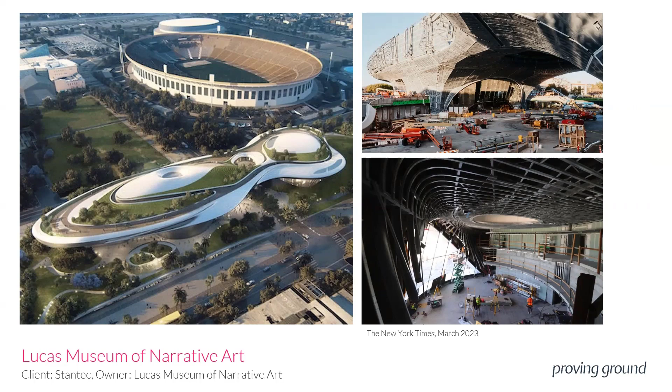Similarly, a project that is very much well underway in construction at the moment and slated to open, I think now in 2025, is the Lucas Museum of Narrative Art. For me personally, I was really excited to work on this project because of my affinity for all things Star Wars and science fiction, and the tie to George Lucas is extremely exciting.

We were brought in by Stantec, who is the architect of record on this project. They partnered with MAD, who is the design architect. We implemented a set of workflows that allowed for this kind of project management to occur with the complex geometry, from exterior paneling systems to some of the development of landscape design to a number of the interior spaces, and the kind of translation of geometry and data between the Rhino and Revit platforms were instrumental.

Now we're kind of seeing the results of that having occurred, by way of these very powerful construction photos. On a monthly basis, I feel very fortunate to be able to see 360 walkthroughs of the site, and we can start to see how some of those geometries that we became very intimately familiar with are making their way onto the project.

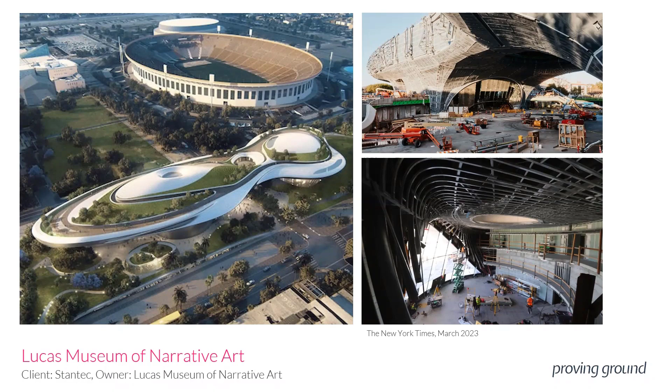That leads into the various paradigms that Conveyor supports, and some of the new workflows that are available in Conveyor V4.

As of this moment, Conveyor supports two types of workflow paradigms. One is based around an import workflow, wherein if you have a Rhino file, you can import selective elements into Revit using a user interface that lets you select the file, select various elements, and then bring them over without having to open up Rhino, and even without requiring a Rhino license. We were able to use Rhino's open NURBS file format and extract information and recompose it in Revit using the Conveyor platform.

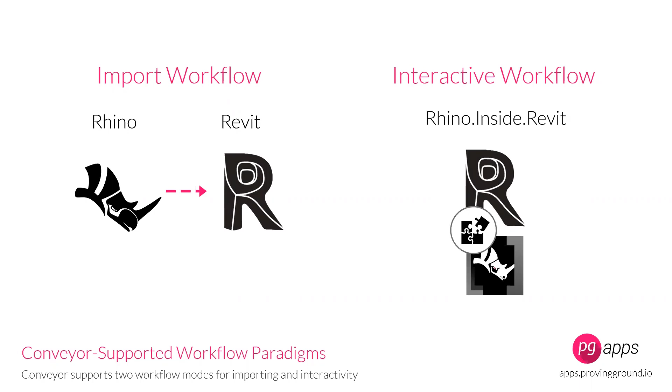We also are able to use an interactive workflow, which is built on top of the pathways established through Rhino inside Revit. Rhino inside Revit is a very popular interoperability scheme that allows Grasshopper to run inside of the Revit environment, and you can do all sorts of things with this platform. What we're able to do with Conveyor is Conveyor can sit within this scheme, and you can then start to use Rhino's direct modeling interfaces, and use Conveyor to do one-click transfers of objects as you model them without the need to touch any of the Grasshopper components. So it adds another level of a very simple integration to the workflow.

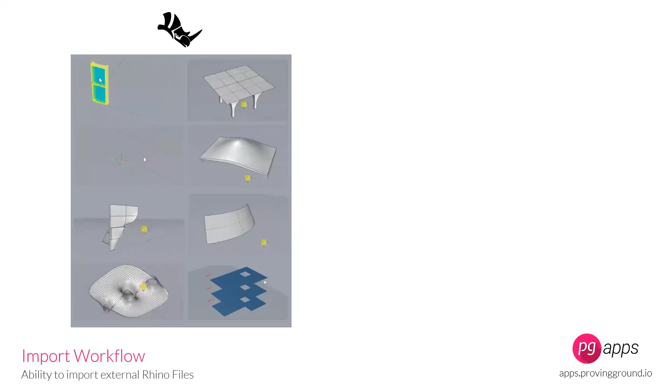The basic philosophy of this toolkit is really about how you start to map geometric elements and components to building information modeling definitions. That's really the challenge of this kind of interoperability and integration between Rhino and Revit. It's the idea that within Rhino, you have a model-anything type of philosophy, and you're working with raw geometry most of the time. In order to get that over into Revit, you have to start to prescribe meaningful categorizations and definitions for what those objects represent.

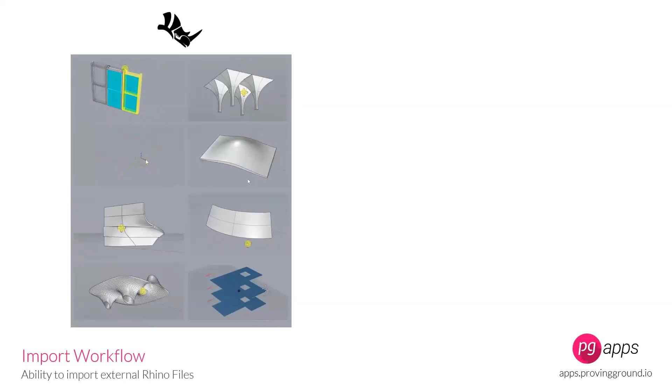So if you have a surface, that surface could be a wall, it could be a floor, it could be a facade element, or maybe more of a specialty feature within the design. And so there needs to be this way of classifying this workflow and these geometries for the workflow.

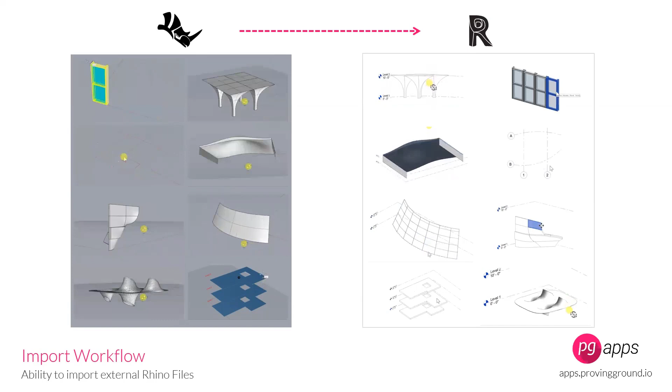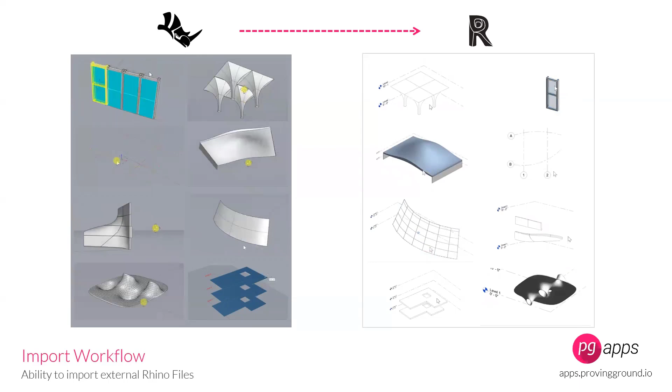What Conveyor does is it provides a user experience for mapping those types of definitions such that when the element is created in Revit, it has associations that are available to the user and are made possible by the Revit API, which is quite extensive but also has various limitations. Anyone that's worked with the Revit API knows there are boundaries with which you can do things. You can bend the rules of Revit, but not necessarily break them entirely. So we're operating within that space to achieve these mappings.

What you find with Conveyor is this system of categorization. You might have a poly surface in Rhino, and you need to be able to say, okay, what is this poly surface actually when it comes to the classification of Revit objects. With Conveyor V4, we've expanded on this, so you can see here you have this ability to import component families. There's mass-based curtain systems, floors, roofs, structural framing members, and all sorts of subcategories within that.

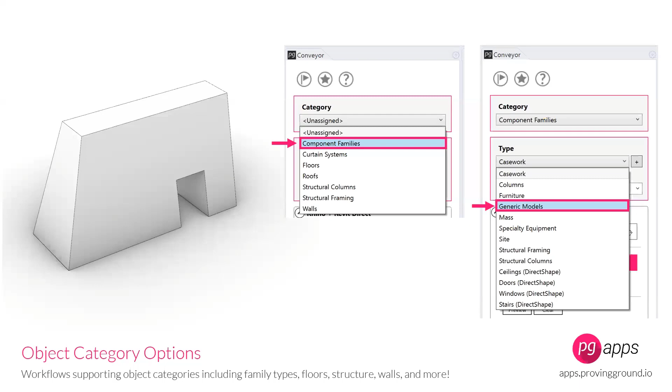One of the things we've made possible with Conveyor V4 is the ability to bring over curtain wall grids. In past versions of Conveyor, we could bring over walls, and one of the things we've been hearing from users of many different platforms dealing with integration is the ability to bring over curtain wall grids and have them assigned to the objects.

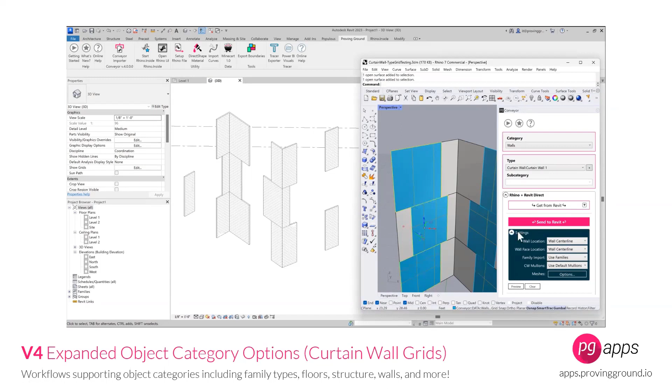Here, what we're able to do is define horizontal and vertical curtain wall grids, very standard, and we have this ability to generate native curtain wall elements with mullions that are editable, or grids that can be reassigned to different types.

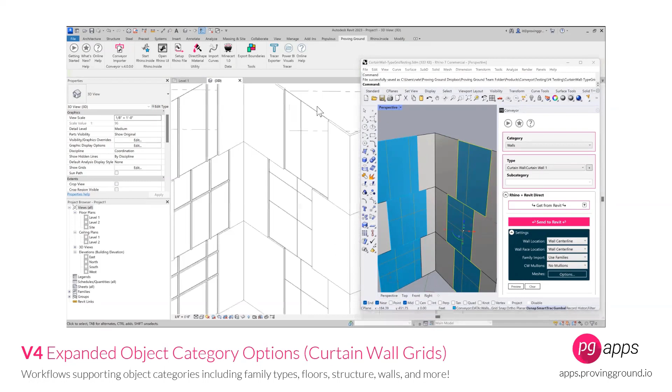The resultant workflow here are native wall objects that have the mullion grid datum. The user has options of auto-assigning a default mullion scheme to the grid, or you can leave the grid alone and assign mullions of your choosing after the import. We saw this as a gap to fill, and we thought Conveyor offered a structure that would allow for these types of elements to fit within the workflow paradigm established in previous versions, V3, V2, et cetera.

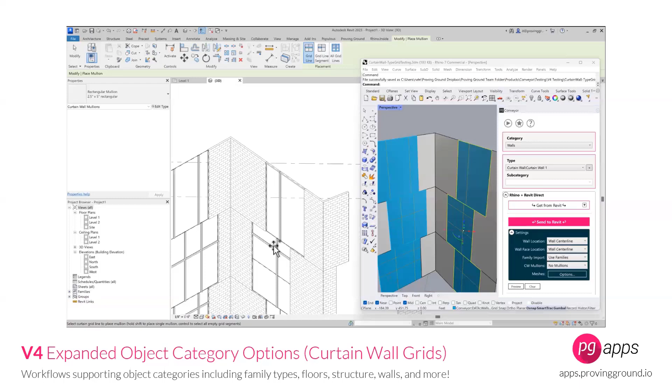Another thing we've heard from our customers and clients is the support for blocks. Now, Conveyor has supported blocks for a while, Rhino blocks, as in collections of object geometry. But what many people do when creating blocks in Rhino is use nested block elements, so you might have a block that is made up of a variety of other blocks.

That was something we wanted to fully support by enabling a geometry transfer that would allow blocks containing nested block elements to come over. As a test, one area we see people grabbing 3D geometry from is the SketchUp 3D Warehouse, which has a whole slew of different things. When you bring a SketchUp object into Rhino, you end up with block elements and nested block elements. So we wanted to see how we could take some of these assemblies, which in some cases have very deep, detailed geometry with subcomponents, and make sure this is supported through the workflow. What you're seeing here is a set of blocks with numerous nested components, layers, and other block definitions within.

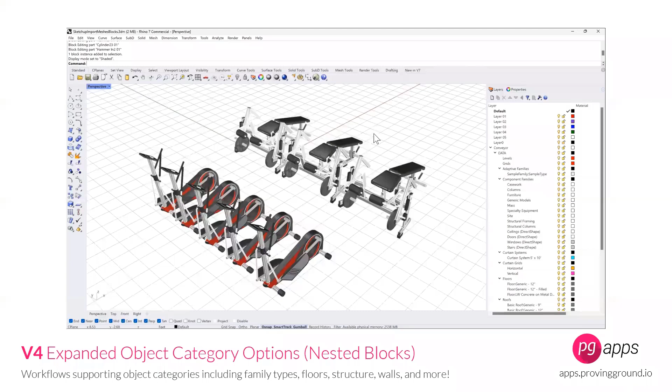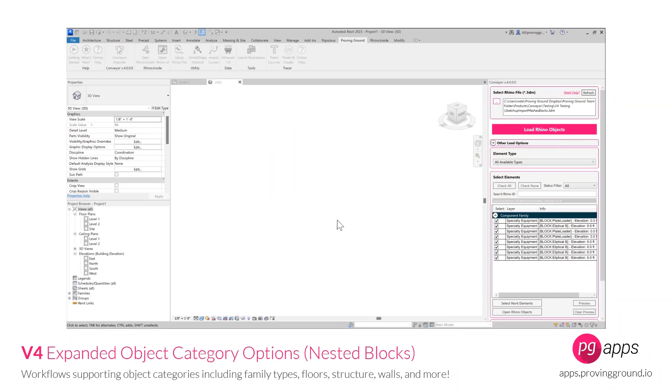What we're going to do here is go into Conveyor and load those elements in. Conveyor is going to drill down into the block definitions and pull out and reconstruct the nested geometry in a single Revit family. So what you have here are Revit families that have the nested components brought in.

Another thing to note here is that this also supports mesh-based transfer. So the underlying geometry in some of these cases is mesh-driven, and those are being dropped into a Revit family, further allowing certain types of geometries to be supported across these platforms.

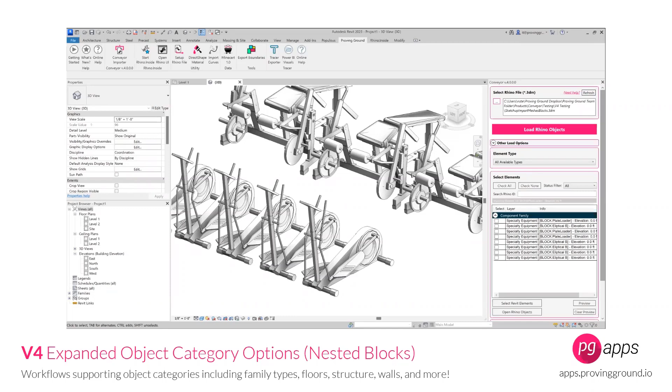Going on to the next slide here. Another area that we kind of expanded support around was this concept of materials.

In previous versions of Conveyor, if you were to transfer a B-rep or a polysurface-based block over, Conveyor would try to search the Revit library for materials that match the Rhino material assignment. So if you had an object in Rhino with a material named yellow, it would jump over to Revit and check if there was a material named yellow and grab it. If there wasn't a match, it really wouldn't do anything—it would just create a blank entry on your object.

What we've done in Conveyor V4 is introduce this idea of transferring basic material properties from Rhino and creating the Revit materials if they don't exist. So what that allows us to do is, say, if we have this...

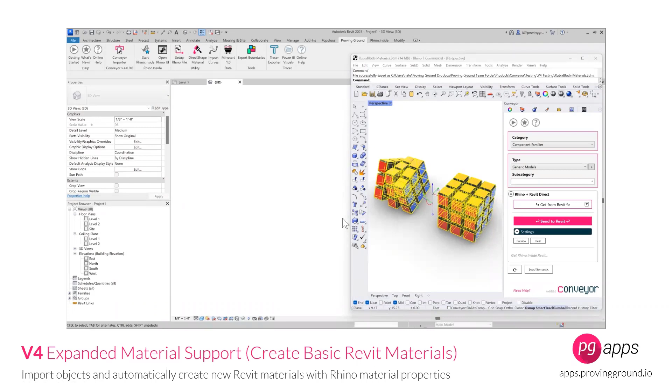In this case, a fun Rubik's Cube model that has a number of different colored materials created inside of Rhino, we can have those materials transfer over with the object itself and get assigned to the resultant Revit object. So what you're seeing here is the families being created, and the material that came from Rhino also being created in the background in Revit and assigned to the object. Those become, for these families, a set of editable properties that you're free to change or edit if you want.

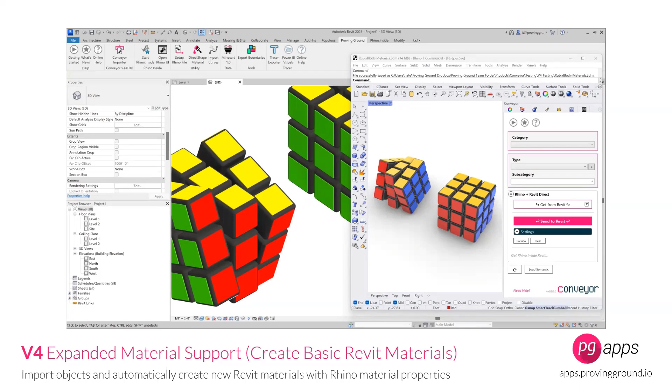We see this as an important step forward for supporting things like visualization and rendering, and also further tightening the level of integration that can exist between these two platforms.

A couple of things have happened on the Rhino Inside integration that we've built via Conveyor that we think are pretty exciting.

We wanted to figure out ways of having a more dynamic back-and-forth user experience for some of the common element types people are engaged with. In version 2 of Conveyor, we first introduced the idea that Conveyor could be launched through Rhino, as Rhino is operated, or as Rhino may have been launched through Rhino Inside. That means the ability to click on an element and, through Conveyor, hit send to Revit. Or if you're in Revit, you could click on a Revit object and say send it over to Rhino.

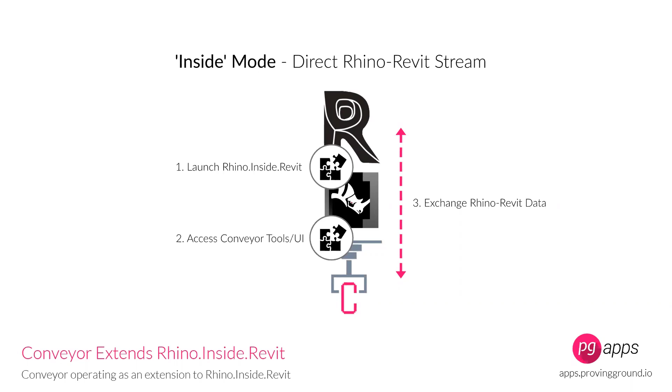That produced this type of workflow where you can select a number of different elements. You have Rhino and Revit operating in parallel, and the Revit objects are created from that Rhino-based information. No Grasshopper use is being implemented here—it's a very simple workflow. If you know how to select elements and click send, that's the basic premise.

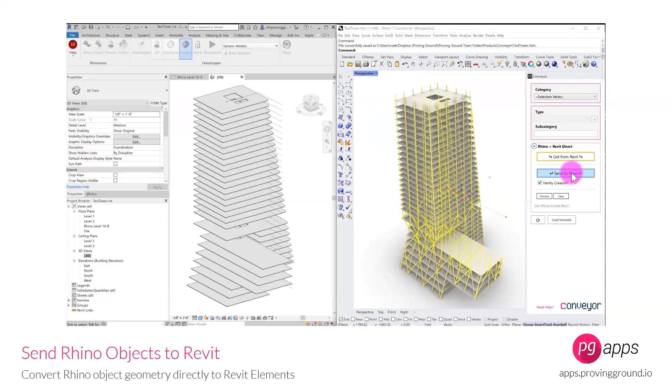So what we wanted to do is build on that a little and ask: what if a user needed to send over, say, a collection of floors to Revit, and then made a few edits to those floors on the Revit side? Could you then pull back some of that edited geometry into Rhino, creating a kind of push-pull type of workflow?

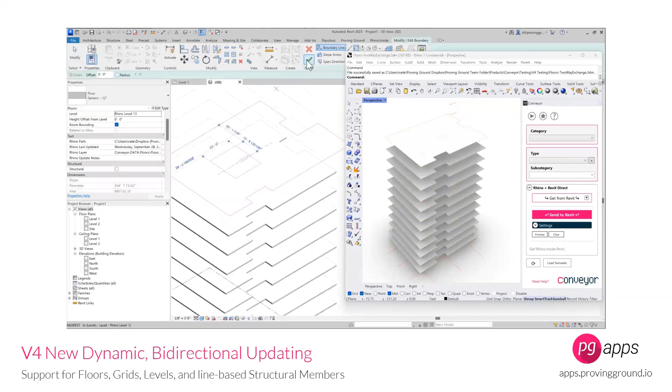We've introduced a level of dynamic updating here. In this case, using floors, we can create a collection of floors in Revit, then edit those floor profiles—creating an opening or editing some of the boundary conditions—and then bring that edited floor back into the Rhino world. We can now do what's called a dynamic update, which will find that previous floor and recompose it using the updated Revit geometry. Then we can continue working on it.

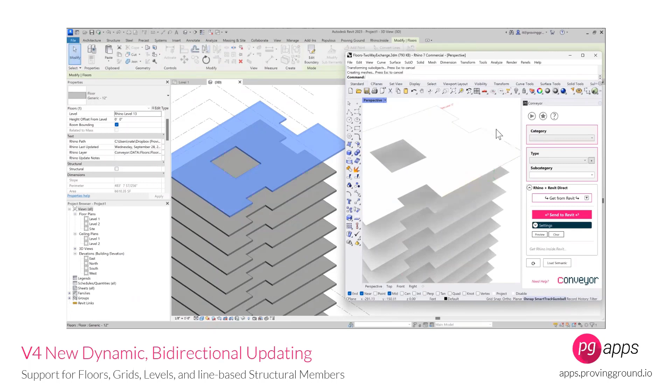So let's say you're now going in and editing the boundary condition of the newly updated floor that just came in from Revit. We'll go through that process, and then select this updated Rhino floor and send it back into Revit. So you can start to envision some of these really powerful push-pull capabilities through this interface that we're pretty excited by.

In version 4, we're supporting floors, grids, levels, and structural framing elements as part of this paradigm, and we'll be expanding those element types as it becomes feasible. Floors are a very good use case for this because of how the mapping of raw Revit or Rhino geometry works in the context of Revit and vice versa, so there's a nice way to parallel this and track updates across the platforms.

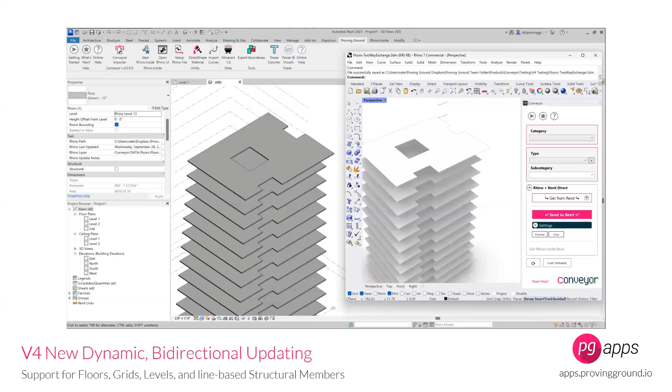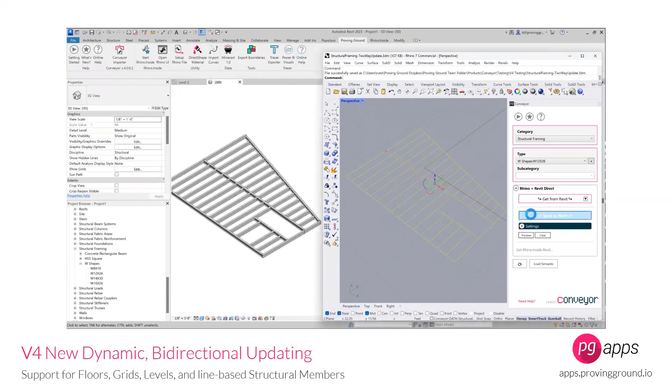So you're again doing that kind of push-pull operation, almost treating Rhino as a wireframe sketch, which then drives intelligent building information modeling elements. Changes to those BIM elements can then go back and transform the sketch using this dynamic update capability.

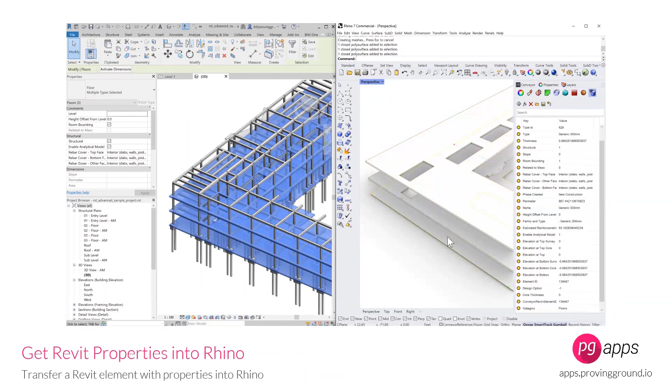Just as a bit of a recap about some of these integrations, the ability to go back and forth and the kind of previous features that have been introduced in Conveyor are still very much present and preserved. So if you're using workflows that you're used to and comfortable with, those are still present.

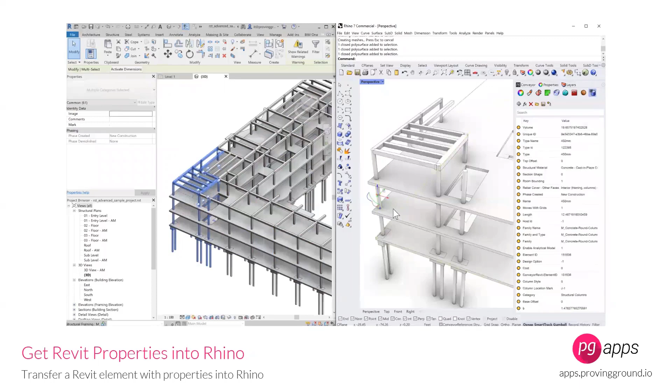This is an example of features that have been introduced in the past for not only converting objects into Revit, or from Revit into Rhino, but also showing that material, object properties, and parameter information is being transferred over as well. And as we go forward here, this is kind of where Conveyor V3 left off.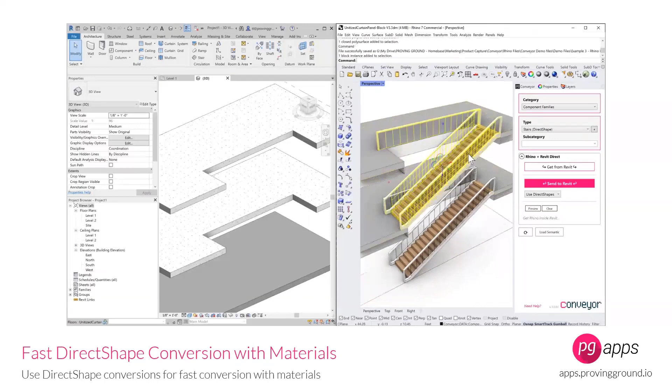We're bringing over block elements and direct shapes with materials being mapped over to them, creating these more sophisticated assemblies and family components and direct shapes using the transfer protocol.

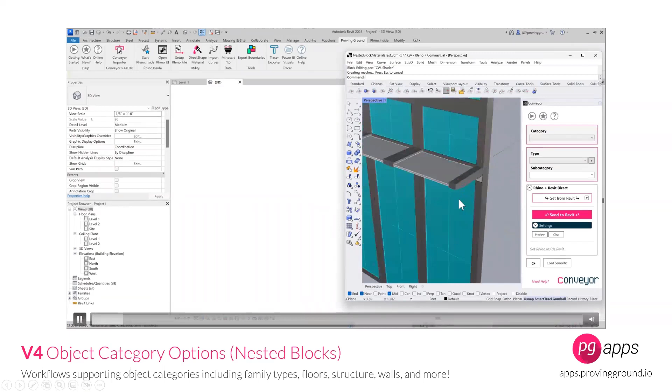But to recap this idea of nested blocks, this is the Rhino interactive mode here, wherein you might have block assemblies that are nested within other blocks, et cetera.

We're able to build on that previous V3 workflow and say, let's load those all into Revit and have them all represented with not only the nested elements included, but also materials that have been assigned to those nested elements. And then those materials themselves can be edited as well when they're brought over.

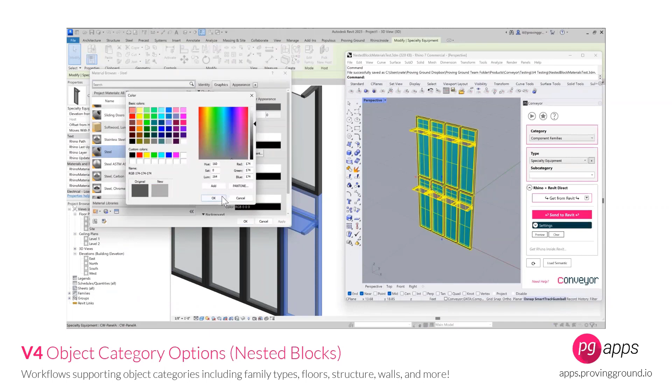So let's see what else we have here: upgrades and perpetual licenses.

One of the things about Conveyor that I think, maybe we're very old-fashioned when it comes to how we sell software—you don't really see this very often—but we do sell Conveyor as a perpetual license type of tool. There is a perpetual license for Conveyor V4 that you can purchase and download, and those licenses don't expire, they don't renew. It's a one-time cost. Then if you want to upgrade, we provide our current customers an upgrade discount to new versions. So it's kind of on you to upgrade as you see fit.

We certainly have customers still plugging away using Conveyor version 1 after 3 years, which is pretty cool to see, same with Conveyor V2 and V3. So if you find the development trajectory appealing between versions of Conveyor, we offer discounted upgrades. As of right now, those discounted upgrades are available to current users, and new perpetual licenses are available as well for purchase of V4.

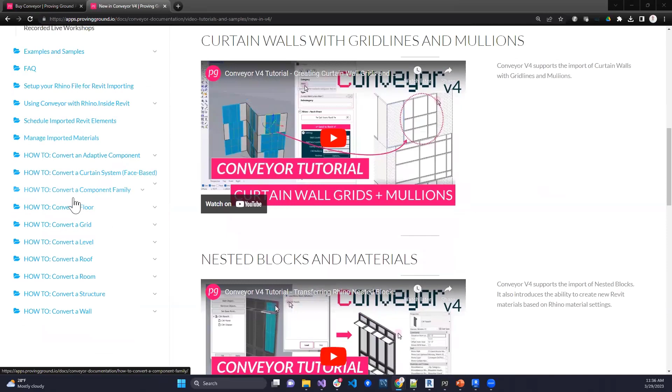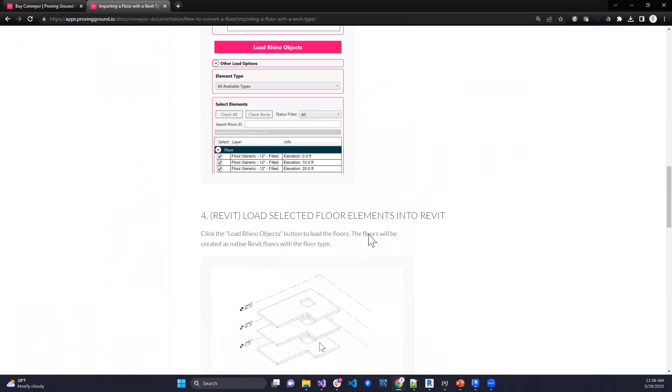Sure, so the way that works, maybe I'll use our documentation resource as an example. If I go to the Convert a Floor resource in our documentation, you'll see there are a number of ways floors can be imported. If I go to import a floor with a Revit type, what happens is that inside of Rhino you're able to define a floor boundary and give it a floor type. Then when it comes into Revit, Conveyor will look for the nearest level that floor exists on, and it will host the floor to that nearest level. So in this animated GIF, there have been a number of levels already brought in, and these floors are imported and mapped to the nearest level. There's an element, especially with floors and levels, of a hosting component. So if you were in Revit and moved one of those levels up, the floor would be attached to it and go with it.

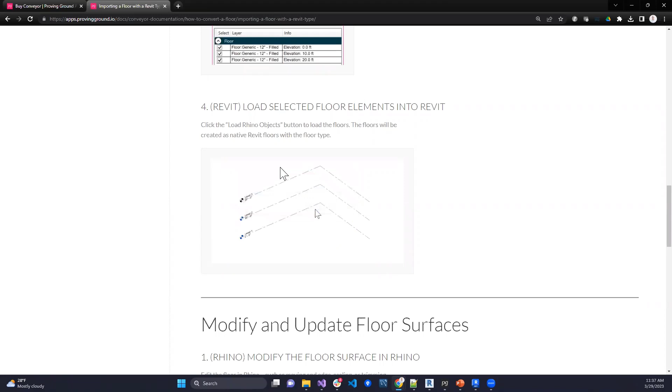There's another question: can the panels within the curtain wall system in Revit be replaced with a curtain wall block from Rhino using Conveyor? Not exactly. Again, the approach is that we can bend the rules of Revit, but we can't break the rules of Revit. So if you were to create a block and bring it over, that block is likely going to be a generic model, some specialty equipment, or some other classified component family.

So you wouldn't be able to just take a curtain wall panel out and put a block in its place? I mean, you could, but it wouldn't be hosted to the curtain wall system. Theoretically you could delete a panel out and in its place put one of the families that have been imported. That's certainly a possibility, but it's a bit of a workaround.

What you can do is, once the curtain wall has been created, change the panel types and go through a normal Revit-based workflow for editing that curtain wall after it's been imported. So if you wanted to swap out a panel type for another curtain panel type loaded in your model, you could do that.

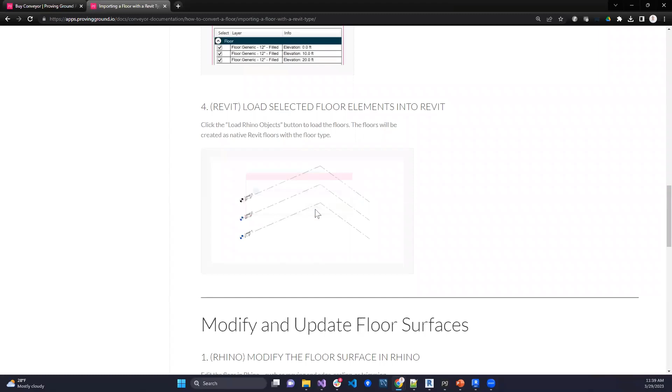The workflow as it is offers two options. You can bring the curtain wall grid in without a mullion assigned, or you can do a blanket application of the default mullion type in the Revit model. We could, I suppose, offer an opportunity to specify the type of curtain wall mullion, but that may be a future exploration we'd want to do.

There's a new question from Philip in the Q&A if you want to take that. Can we use multiple linked Rhino models with a single central Revit model? Just wondering how to save and reconnect back to the Revit model. That's a great question.

So you are able to—there's no limit to how many Rhino documents you may be using at any given point in time. For example, if I open up, let's see if I can get into Revit here. There is the possibility to say, okay, let's say I'm using this model and I bring in a number of different workflow element objects over into the Revit world.

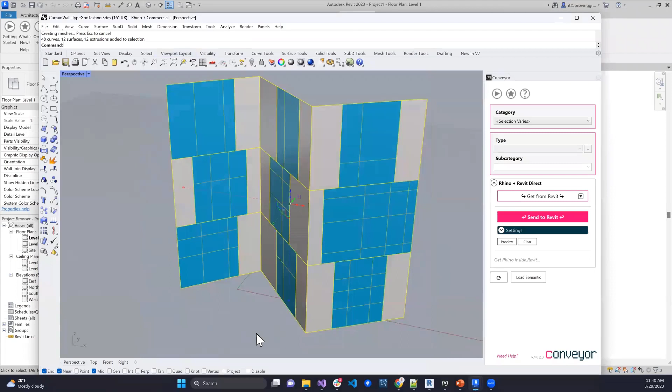I could work on this model for a while, and then I'm importing into the Revit model here. So this open Revit document could be a central model, sure. I'm bringing elements over from this document, then I could open up another Rhino document, or if I'm using linked Rhino files in a work session, activate one of those other files and transfer objects over there.

In fact, last year, Nicole and I ran a tutorial session webinar where we did exactly that. We structured a project—in fact, let me go see if I have it. I think we have it sitting in our documentation. If I go to video tutorials on our website, we have a recorded live workshop section from March 2022, with the workshop data set. This may be a really good one to drill into, Philip.

Because what we have here is a scenario where we had multiple Rhino models linked together via a work session. We used Conveyor to bring over elements from the various Rhino models through the work session, and progressively brought them over to a single Revit file. So it became as much about learning the different workflow techniques available in Conveyor as it was about learning a possible model management strategy for a complicated building structure and assembly made up of multiple different types of files.

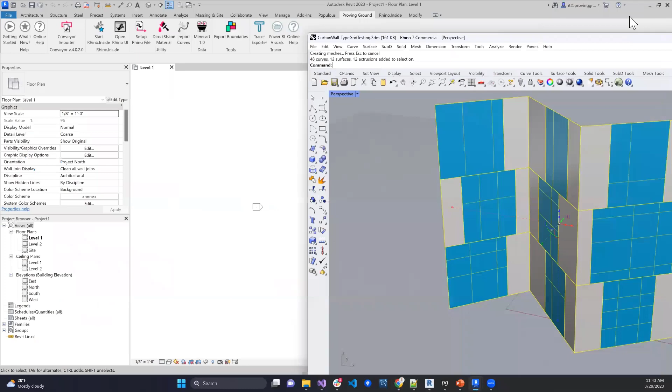Is it possible to transfer geometry to Rhino from linked Revit models? One example is working with a Revit model where the coordinate system is separate. Oh, I see. Yeah, so this is a bit of a limitation—if you have linked models inside of Revit, those model elements aren't accessible to the workflow unless you activate one of those models.

So if you wanted to bring over some of that geometry from a linked model, you need to make that linked model the active document in Revit in order to access the objects and its properties so you can transfer them over to Rhino.

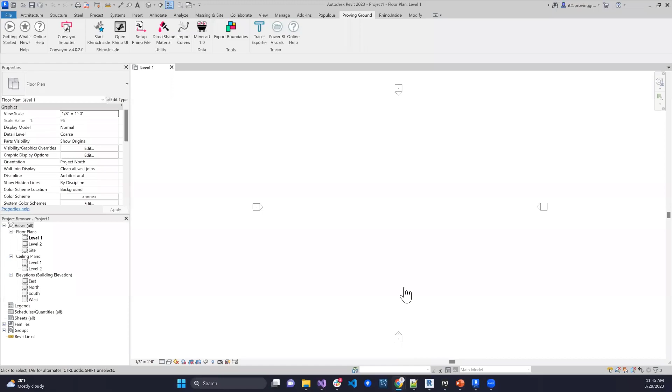Do you offer training sessions for a company if we purchase a license? We do offer training as a service that we provide. There are 2 possible pathways to this. If your company is set up under one of our enterprise agreements, meaning you want your company to have access to this tool at scale across different teams and individuals without getting into perpetual license management, as part of those agreements we include onboarding training for your firm, as well as more dedicated support as needed, advising on maybe a workflow project, things like that.

Now, if you've picked up a handful of perpetual licenses, we do offer training via our consulting. Proving Ground at its core is a services company, and we offer various training and knowledge-based services for these types of activities. So, for example, you can get access to Rhino and Revit workflow training with Conveyor, leveraging Rhino data with Semantic, analyzing Revit data with Power BI and Tracer. Those are available types of training that we provide. We've also done some more nuanced training around SQL and general data management concepts for companies.

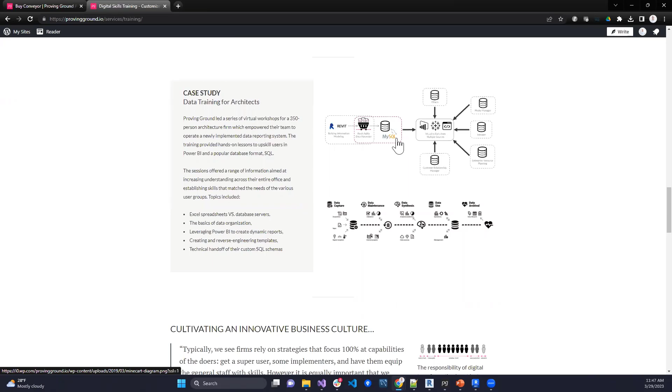Those are things we'd be interested in talking with individuals about. If we're being brought in to support a project, we oftentimes will then provide levels of training for the project team. There were workshops, for example, for the Lucas Museum of Narrative Art, as well as the Gilder Center team and Studio Gang team, as part of our services there as we were implementing some of these technologies.

Are those trainings in-house trainings or online sessions? I'll be quite honest, we have not been asked to do an in-person training in an office for about 3 years now, and I think the reasons for that are very obvious. When the pandemic occurred in 2020, we went full virtual on basically every single service that we've offered. And we have been running workshops and strategy sessions and various forms of training virtually ever since, and we, with rare exception, haven't been asked to come into an office.

But if you're interested in having us come to your office, we're more than happy to do it. I think one of the things that many companies have realized is that they can get effective training virtually without having to pay airfare, hoteling, and per diem costs. But there certainly is an argument to be made that in-person training can still be quite valuable. But our online sessions are live, they're interactive, and if you're not tired of hearing my voice on this webinar, you certainly would be tired of hearing it by the end of a set of virtual online training sessions.